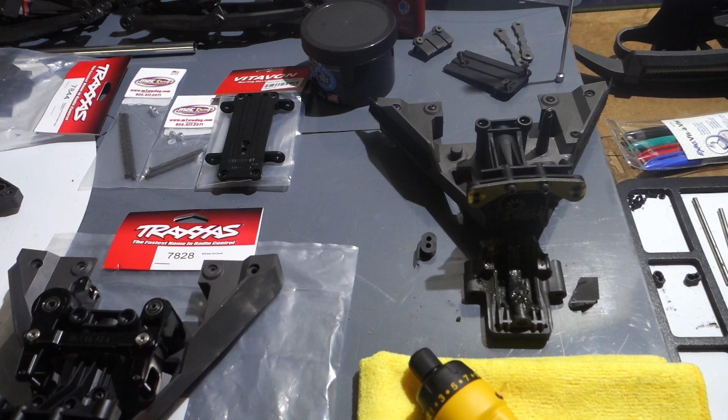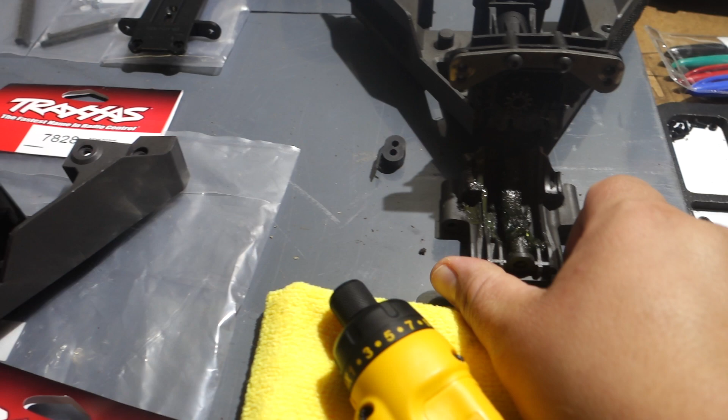So, like a few others, I ended up cracking the upper front bulkhead, and I also managed to blow out the bottom bulkhead as well. So I got fresh parts, but then I got to thinking - I watched Earl Moorhead's videos, and he gave me some thoughts.

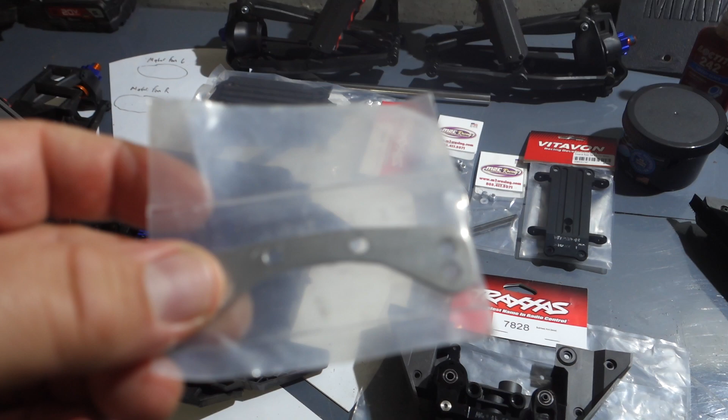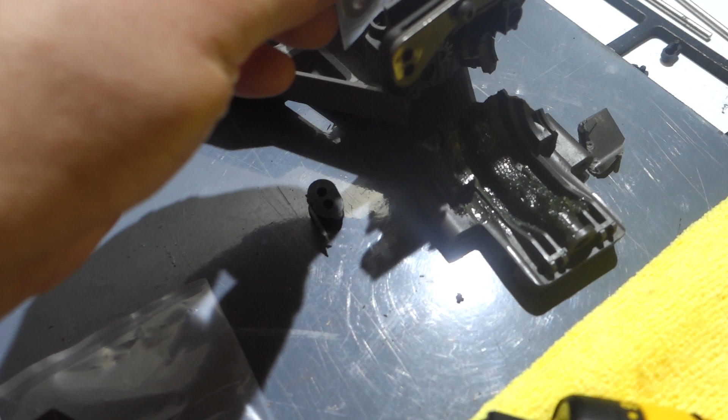So obviously I went on - you can buy these Traxxas plates, I'm not even sure what they're officially called. I ended up going on Amazon and buying some stainless ones - if I can find a link, I'll put it in the description. What Earl had done, I'm sure you've seen his videos, he made some modifications to put it on the back side of the bulkhead.

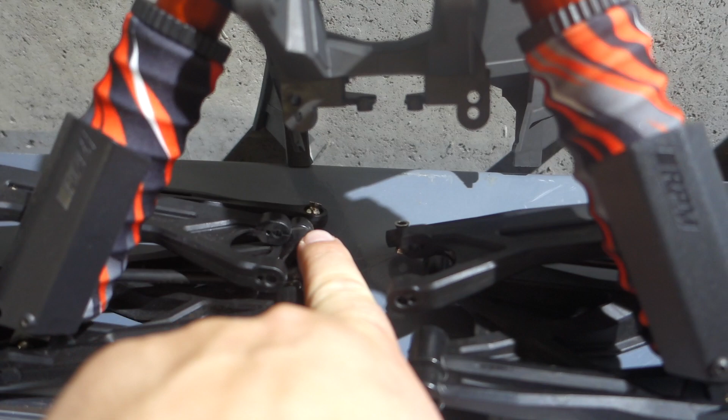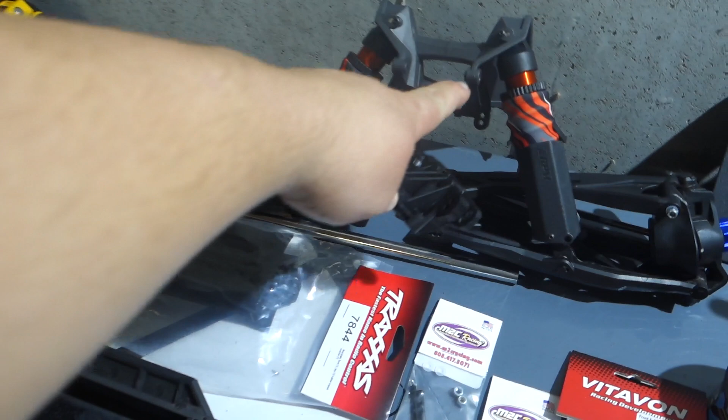That said, though, ultimately what he ended up having to do was shave down the inside of the upper control arm, and I wasn't too keen on that. So I was trying to look and see what my options were. I was looking to see if I could maybe cut a slot in there to slip in one of those bars, but unfortunately your shock towers, that piece slips in there, so you can't really do that.

So what I ended up doing - fortunately for me, I went ahead and got the M2C hinge pin set, which is a little pricey, but honestly they're really nice pieces. They give you the uppers and lowers, inner and outer, as well as the lower shock pin as well.

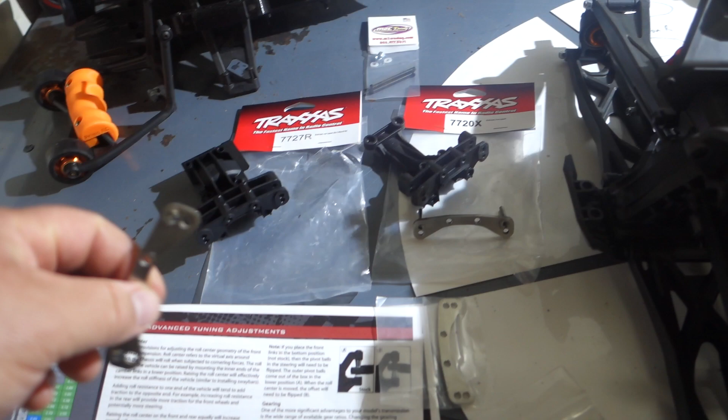And I was sitting here tinkering around, adding on all my parts, trying to rebuild this thing, and I had the thought - I said, geez, why... it'd be nice if... those lower shock pins actually look like they're about the same width as the bulkhead. So I grabbed one of the stock ones I had, I slipped it through, and sure enough it was a perfect fit.

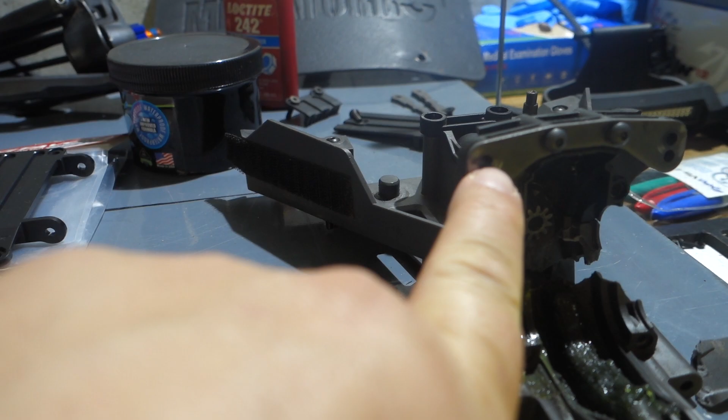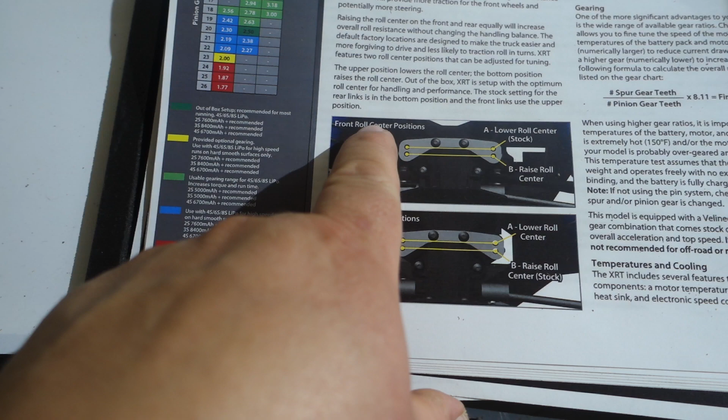And so then I said, man, I think part of the issue I had with the upper bulkhead blowing out was actually due to where the OEM position is - it uses the upper hole there. You look in the manual here, it shows you the position for, I guess, roll center. I'll be honest, I don't really have my mind completely wrapped around what roll center all means.

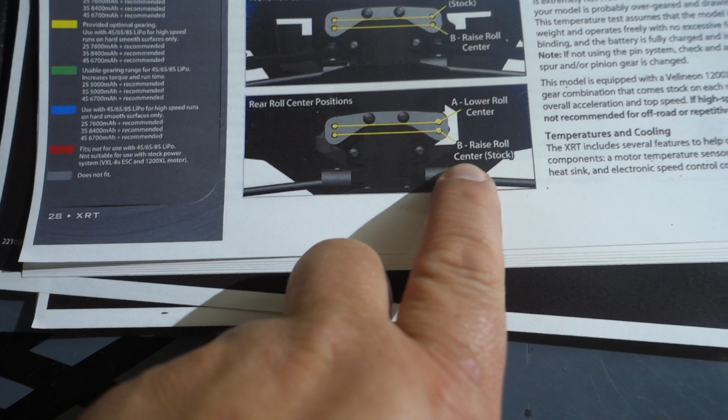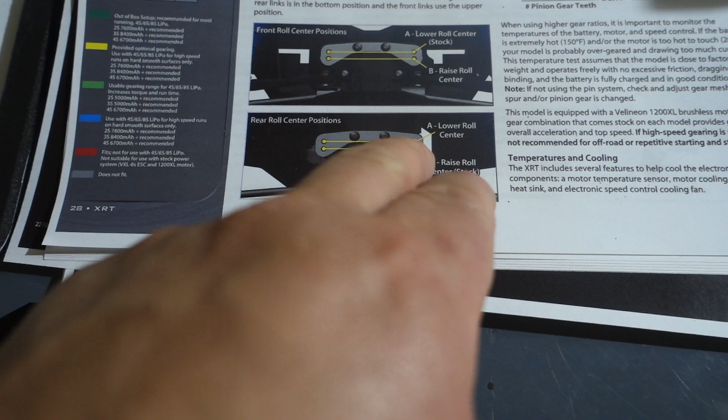But in stock form, in the front they leverage the upper pins, and in the rear they leverage the bottom pins. Just common sense tells me, well, putting them in the bottom is probably going to be a little bit better. It might change the characteristics of the driving and such, but from a rigidity standpoint, I think putting them in the lower ones is probably better. So my plan is to put them into the lower ones.

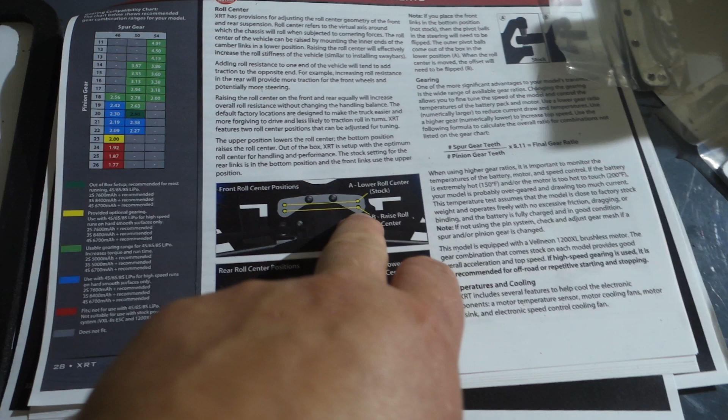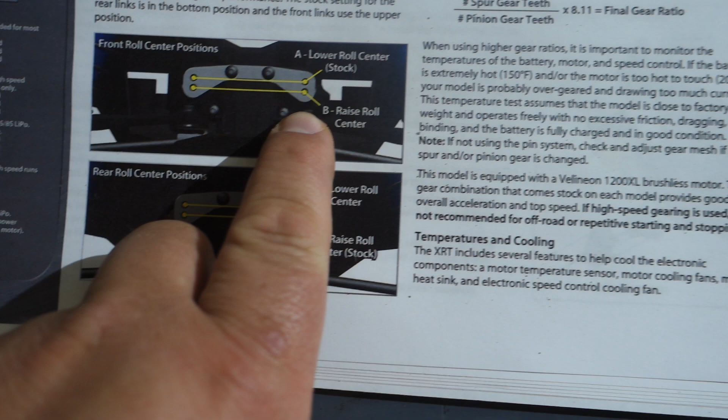You do have to switch the tie bars - sorry, the steering links. Again, my terminology might be wrong, but you've got to flip them if you're going to use the lower holes like I am. But when I did that, I said, geez, I could probably take those shock pins and take the metal plate I have, and if I could find a way to attach them...

So I said, all right, well, maybe I could JB Weld them or something like that. But then I just decided I'd bring it into work and have somebody tack weld them. So that's what I did there. I got those two shock pins tack welded onto this bar that'll fit into there.

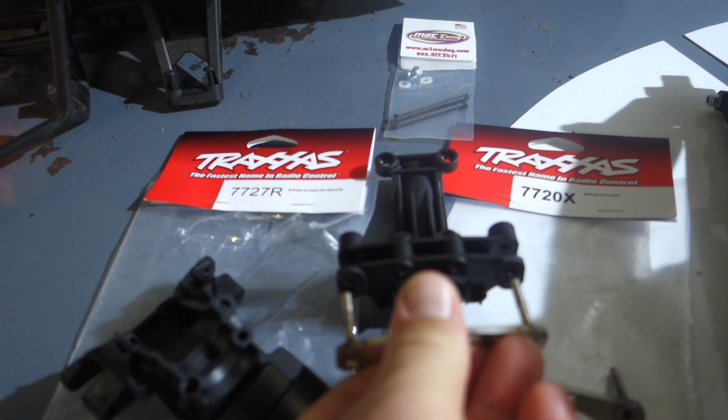I'll put the camera down for a minute. I'm not even using a tripod, but I'll pop that in there. Of course it's going to play hardball for me right now because I'm on camera. I'll do the rear.

There we go, sorry it took a minute. So you can see it takes a little finagling to do. But now I figure, having those two welded pins in place will fill that empty void. Under normal circumstances, that upper hole in the front of your XRT is going to be empty, so you have a cavity there with nothing in it, and it's not going to be very strong.

I figured it wouldn't hurt to have that pin, so it'll add a little bit of mass, add something to that so it's not empty. And then it's flush there, the way we did it. But then you can put your hinge pin through there to connect your control arm, and you'll be in business. So I don't know if it'll be any stronger or better.

I figured it wouldn't hurt, and I wasn't using these pins anyways because I have the M2C ones. I don't know if Mitch or Avery from M2C will see this, I'm a new M2C customer, but a fan of their products.

They certainly look good, but this would be something that they could probably whip up pretty good and have a good solution. I was thinking if they made these plates and then threaded that hole, they could make a pin the right length with a thread on the other side, and you could thread it in and not have to worry about welding it. That might be a good solution or product to add.

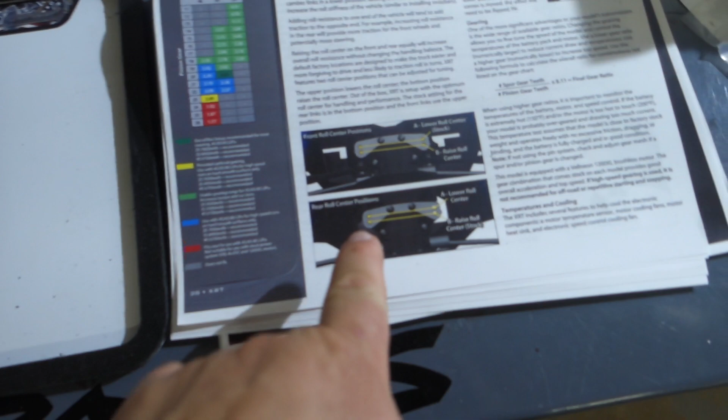Then it'd be nice if you could thread both holes, and you could choose whether you want to run the upper or lower, but the reality is you wouldn't be able to get your hinge pin through. So you could make two different plates, with either the top holes threaded or the lower holes threaded, and they'd all use the same pins. You'd maintain the ability to adjust your roll center by using the lower or uppers, depending on which plate you bought.

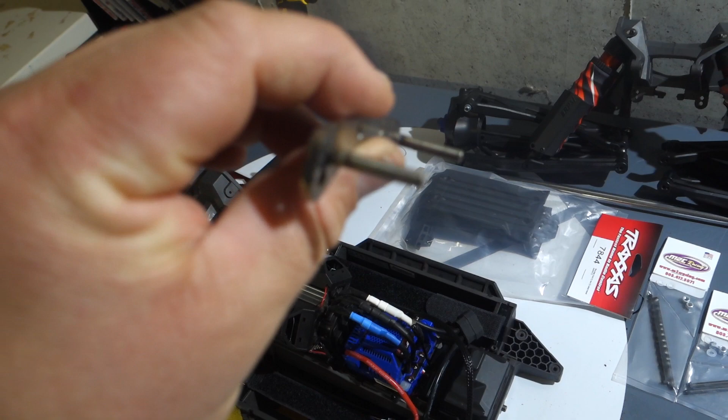And then you could effectively accomplish the same thing I did here without having a welder. Again, I don't have one, I'm fortunate to have somebody at work that can do it for me.

So, I don't know, sorry for the long video. But again, just wanted to share something I stumbled across. I think it might be a good idea.

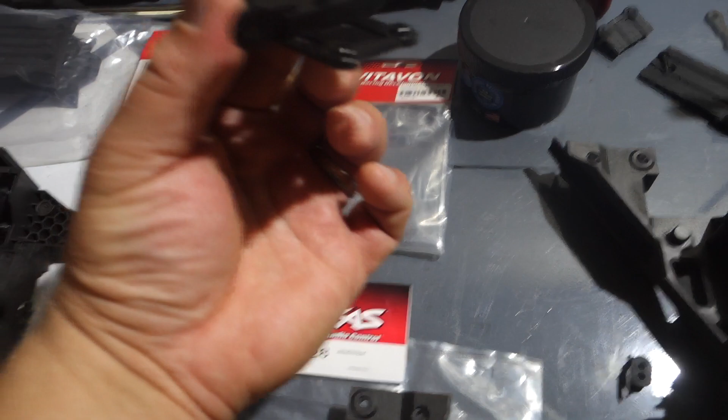Like I said, I'm trying to beef this thing up so hopefully I don't do the same thing again. I figured coupled with the Vitavon tie bar plates, which are pricey, but man they're sweet, and they really do help. There's another video on YouTube that shows how stiff they make it, but I got the rear one in, and man it tightens things up real nice. So I'm hoping between that and this, hopefully I'll prevent that, but time will tell.